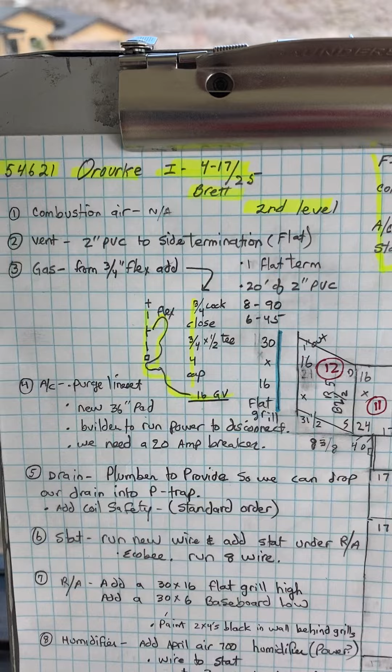Okay, this is on the Orourke job, number 54621, installed on 4/17 through 4/25 by Brett. This is for the second level. This is video 2 of 2. So, come in the front door, come up the stairs. We've got this wall right here.

And we're going to have return air, a little one low, 30 by 6 low, and 30 by 16 high. And I put another one low just because half our joist space is taken up by these four 2x4s. So that's why when you cut these in, paint the 2x4s black. And turn the grill upside down so you can't see up into it on that one. Anyway,

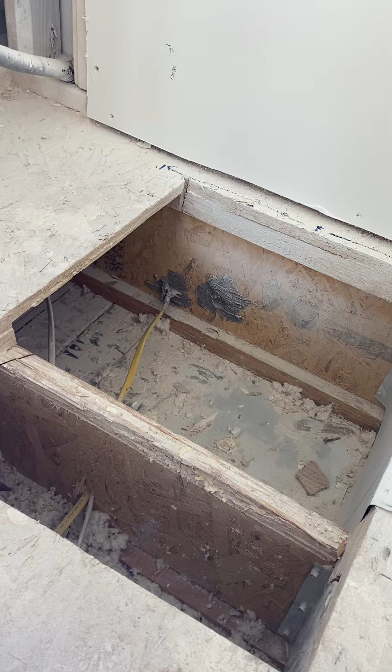okay, so this is all screwed up from the people before. So this is going to be a downflow furnace. You can see what they've done here. See there's that 10-inch pipe back there? And they've cut through the joist and did all this stuff. And then they just panned it and cut a hole in the top of a duct. So what we're gonna do, we can't keep this open to the truss space because it's not return, of course.

So these wires in here, this one here just goes up to this outlet, so that can be pulled out and relocated easily. This one here, I don't know what it does, but somehow we're going to have to break it down here and get it down so we can get our duct in here. So, yeah.

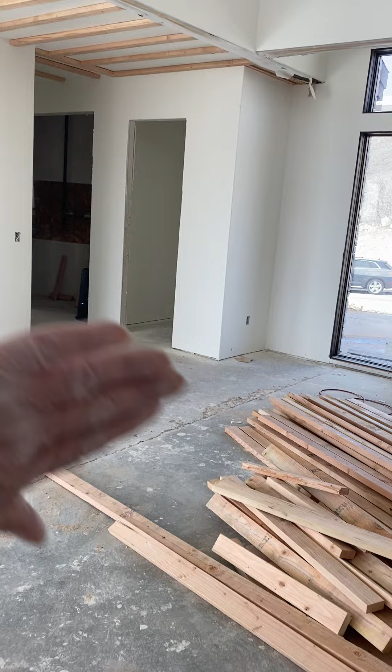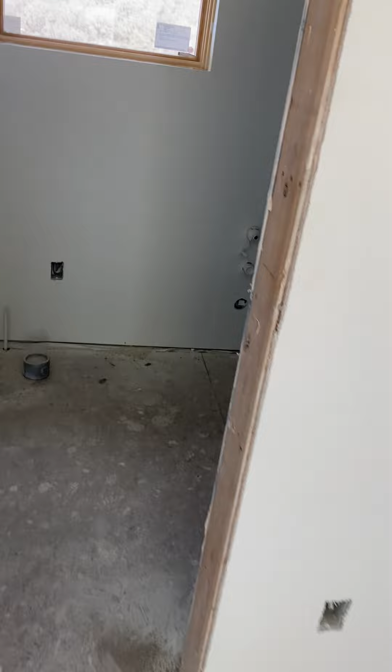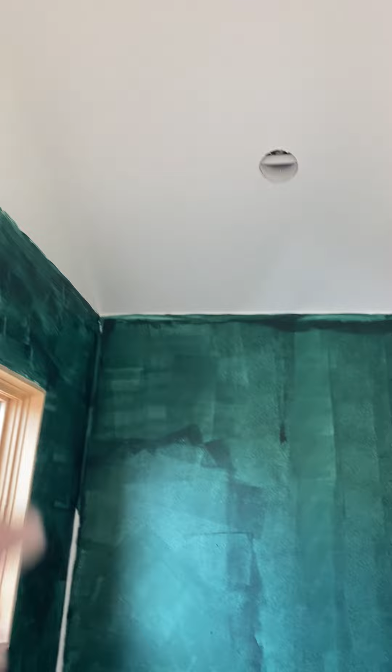So real quick, the other furnace room over here, that does this side of the house. This furnace room over here does this side of the house. So while I'm talking about the exhaust fans, in this top floor, the bathroom, they've got a fan there, but I don't see it coming out anywhere. So you have to bring that through the eave, I'm guessing is where they dropped it, but whatever sheetrock you have to cut out to get to the eave. I don't see an attic access up there, so I'm guessing there probably isn't one.

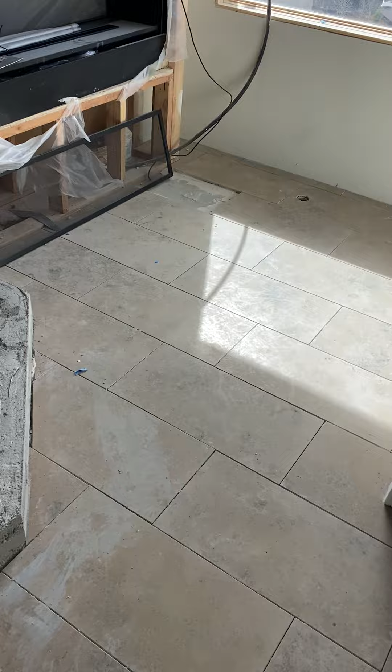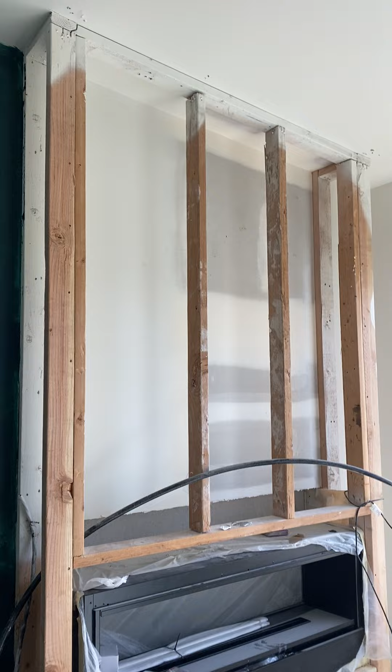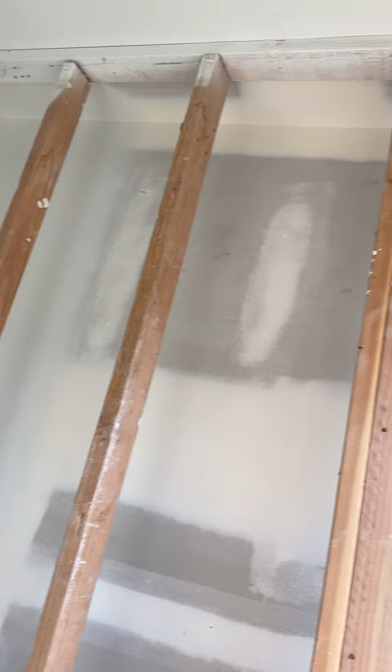Anyway, and this bathroom over here, this is going to be a steam shower. They put an exhaust fan up here, but we'll have to find it. But they want also an exhaust fan in the steam shower. So coordinate with the builder where he wants it, but we're gonna have to run it up and then probably out the eave. I believe we have the little, let's see, is that where it's at? Oh, yeah. Yeah, that's what we need to do.

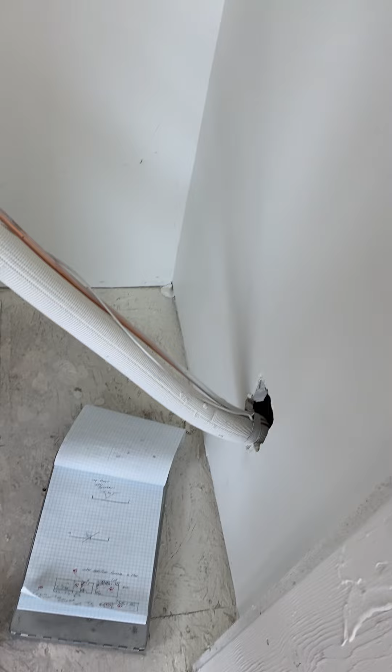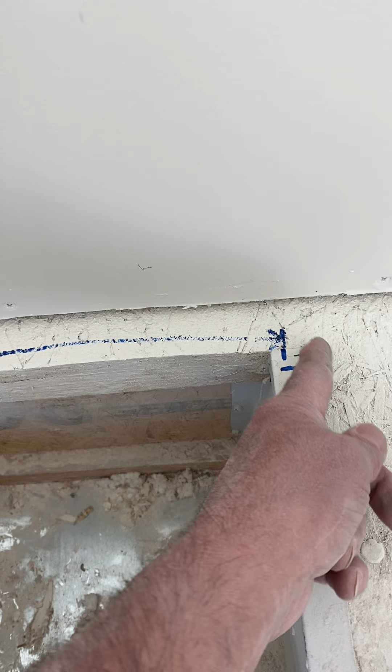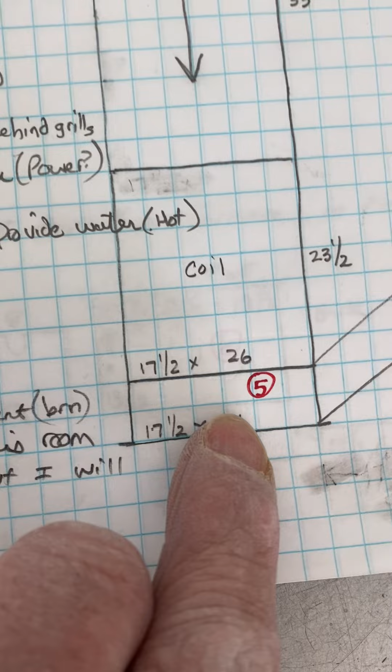Okay. Sorry, I got off on a little rampage there. So that floor is going to be a little tight. I drew on the back where the furnace will sit, but the flanges will come out, but then we'll have a 1-inch out on this duct to cover our flanges. Okay, so we have a, I didn't draw the length on that.

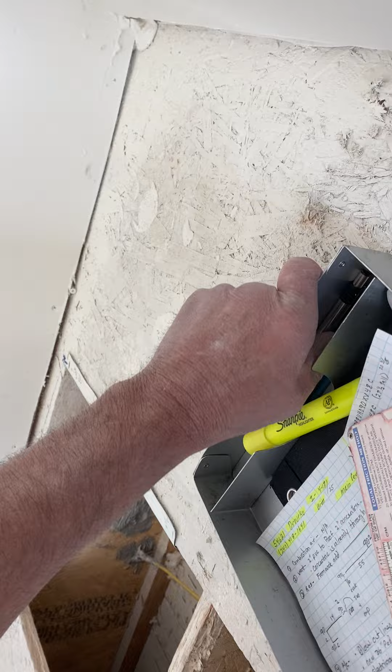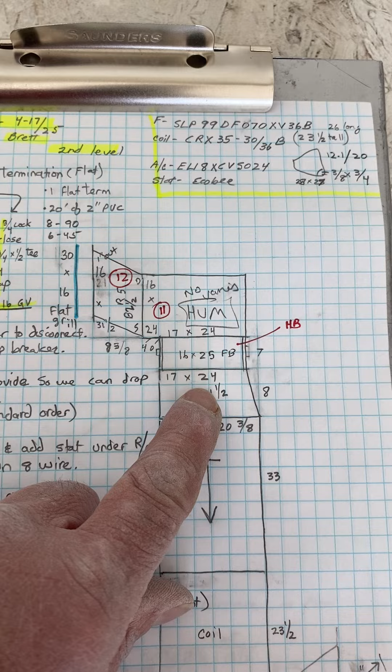Goodness. Okay, so 6. Okay, so we have a 6-inch tall base, our coil, then our furnace, then I made an 8-inch piece so you can get your flues out. Then a filter box. Filter box I set back 1.5 inches so the back will be tight against the furnace. Sorry, against the sheetrock. Then I put a 90 and then this fitting.

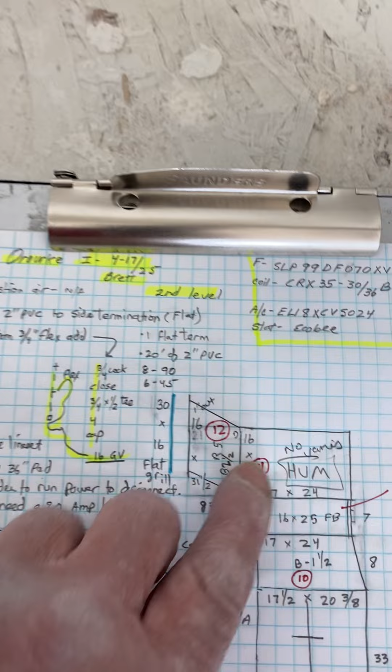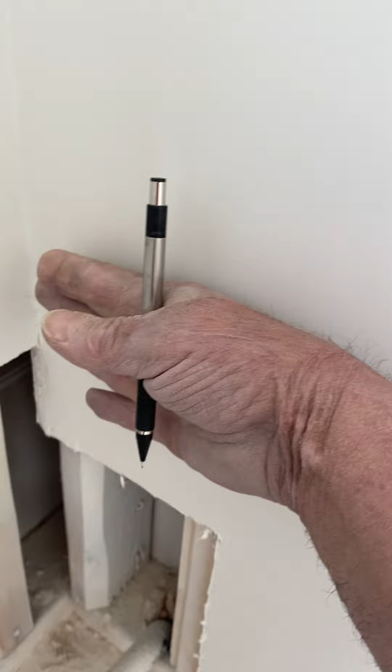So that fitting, actually the bottom will come up 1.5 inches to line up with this 2x4 here. So it's going to come this way. So this is the top of our filter box, and our other duct will be 16 inches up from there. So I actually ended up making that bigger. Oh no, I didn't. Yeah. 16. Oh, but I'm going to change that. 16, 17, 18, 19, 20, 21.

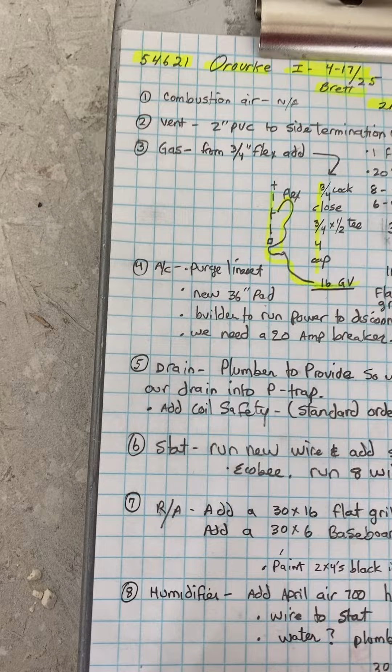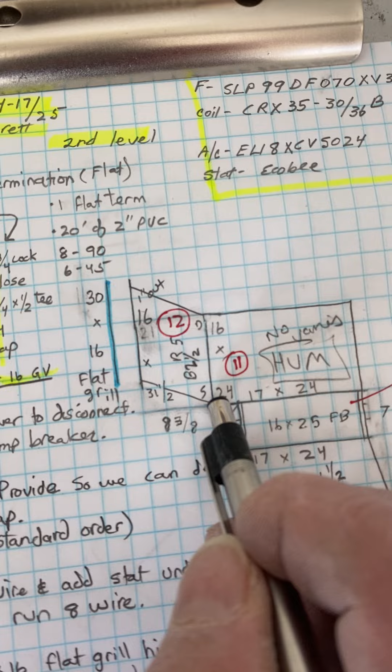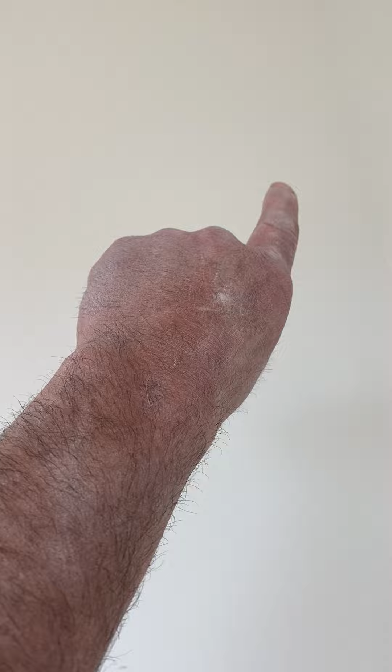Well, this here I'm going to put 21 in the bottom. I just have it offset up, but since I added that grill low, no, that'll still work. It'll still work how it is. Anyway, so we'll just cut a hole there, but then we're going to use the sheetrock to put a grill down low. I put the grill down low because we have all these joists that are blocking half our airflow up high.

And I told him that we'll get it up as high as we can, but he wanted to try to keep in this room, in the future it's going to be a bedroom, but you know, this is the closet for it. He wants to somehow do some kind of a drop down with shirt hangers or something, and I told him I don't see how that's going to work, but I told him I would relay it, you know, when you get your flues out, maybe talk to him and see if he wants you to go up high.

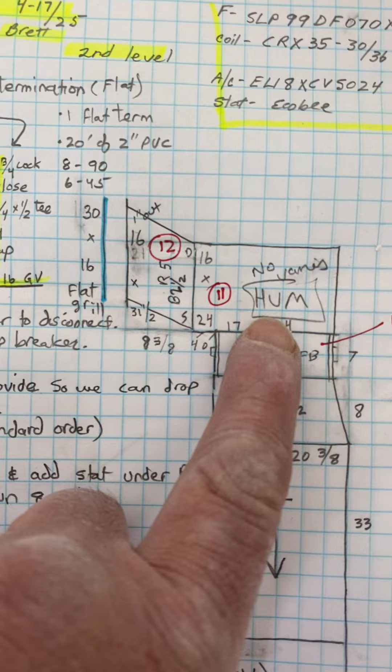Yeah, I mean, we can't go too high because we have our roof overhang, but try to work with him to get as much room as you can, but I don't think it's going to work as a closet because we need to be able to get in there. Can't have our clothes next to the furnace. Okay, that's that. So combustion air, not applicable. Vent, you're going to run 2-inch PVC to side termination, flat.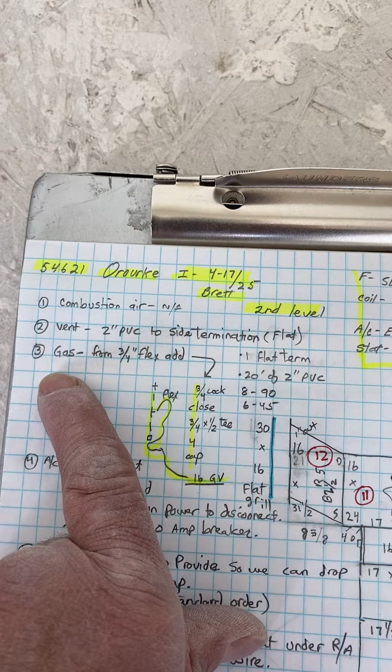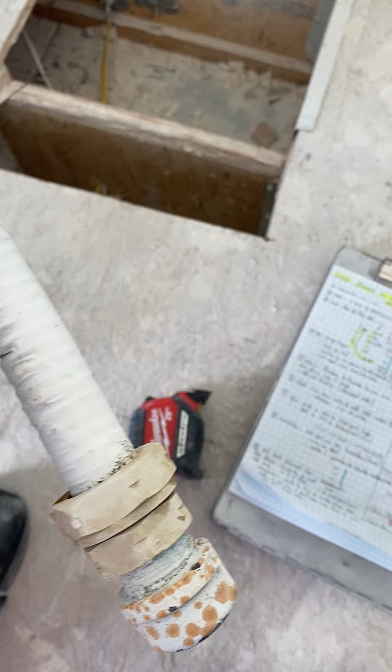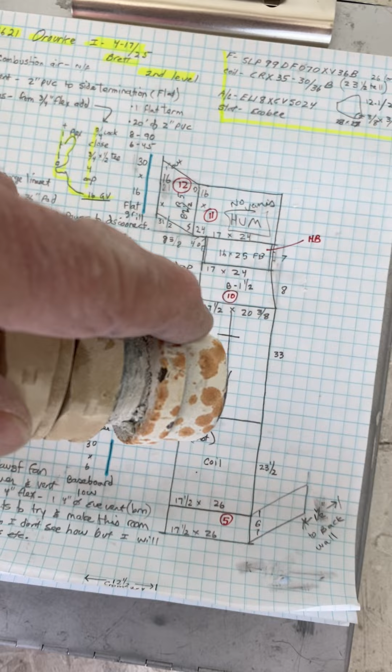So your gas, so I'm just planning on using this flex here. And you can cut the flex down and we put on that fitting, or coil it up how you want, but from the flex, so I have a 3/4 inch cock to go on the end of this, a 3/4 close, 3/4 by half T, cap, then that 16 into the furnace.

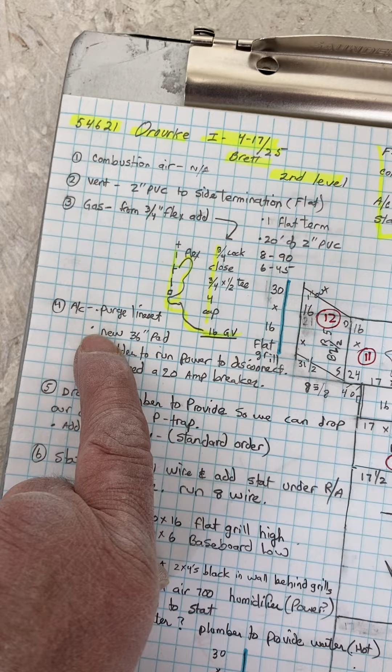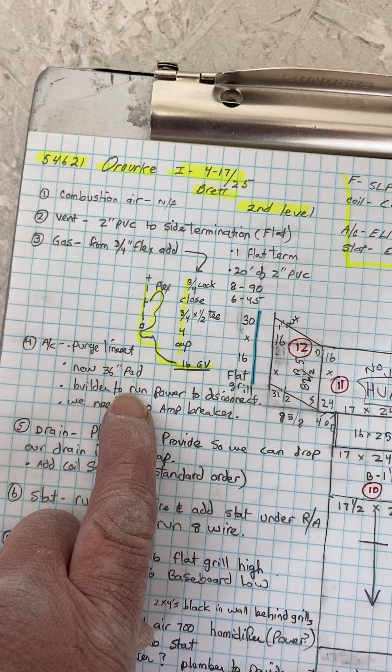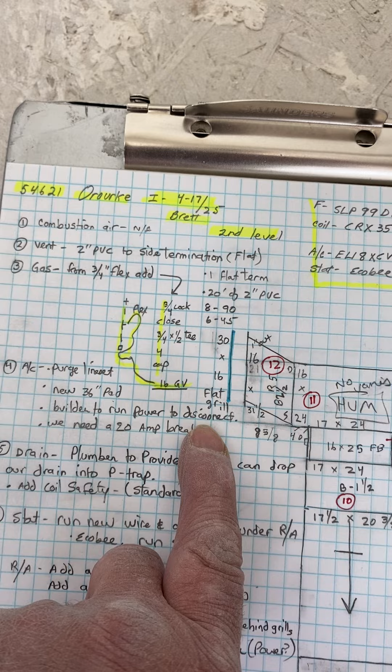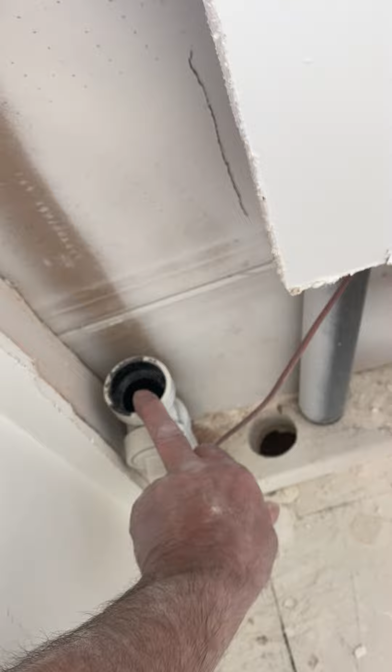Okay, the drain. So right now they have the drain right here. Our coil is going to be on a 6-inch, so it's going to be higher than the floor, but we're going to need a P-trap. Plumber's going to need to provide a P-trap for us so we can just go and drop in. So you can see this pipe from below. So somehow he's got to get a P-trap, and if he wants to put a bell here, whatever he wants to do, well, he actually needs to bring it out of the wall because we need this sealed up for our return air on the other side.

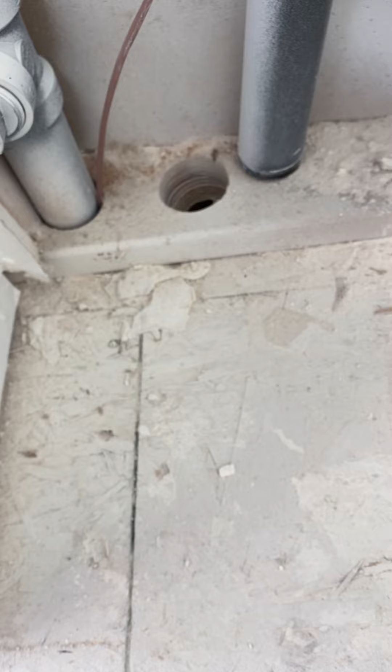And if we don't want to, I mean, we can always put the grill a little bit higher too if this is in our way. Anyway, I don't know what this wire is. I was told we're running a new thermostat wire because they got buried, so we'll plan on that. Okay, thermostat. So run a new 8 wire, and we're gonna have a thermostat just right here. He said as far away from the return air as we can, but we're in the middle of 2, so it doesn't matter really.

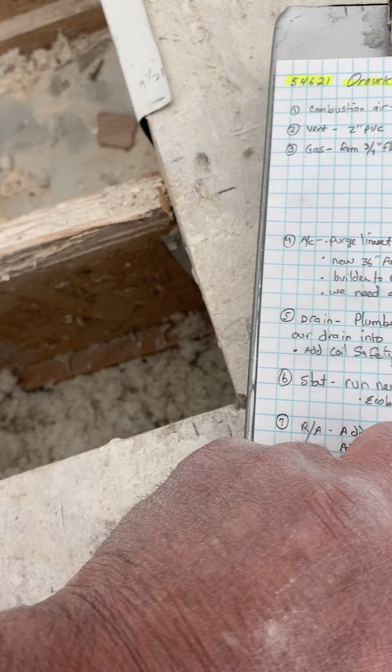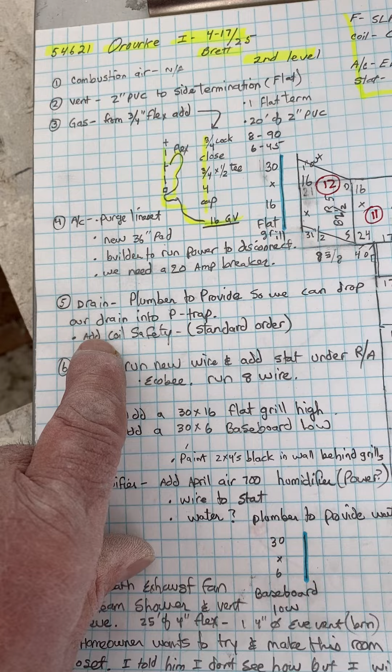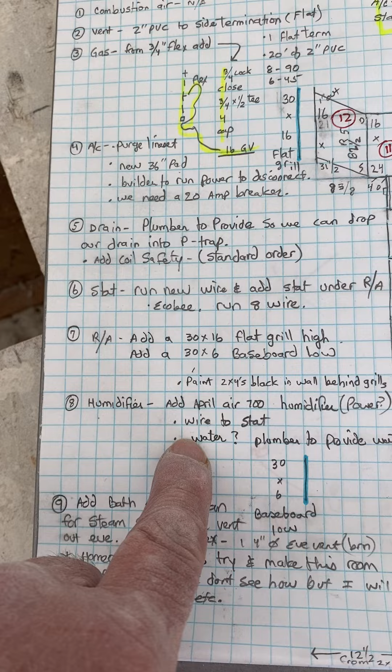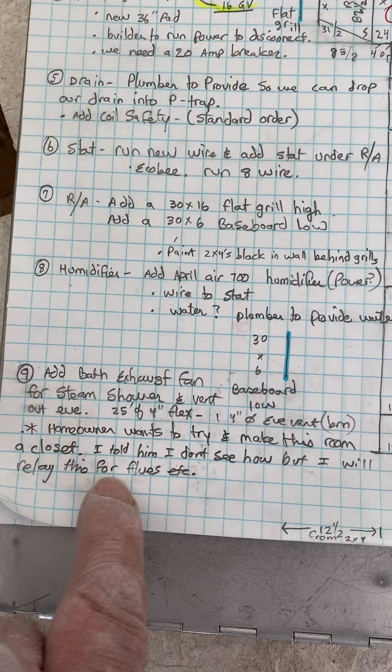So we will be installing a humidifier. There is no water here, so the builder's going to have to get water, 1/4-inch hot water line to us. Okay. Oh, and the drain, add coil safety switch there. But anyway, our humidifier will need to wire in with our Ecobee thermostat. Return air, okay. Paint, okay. Humidifier, okay. So, I told you about the bath exhaust fans for steam shower. This room, a closet, okay. Okay, I think that's it.

There's a lot to this job, but the builder and the homeowner are very, very nice to work with, and the builder wants to be involved as much as he can.